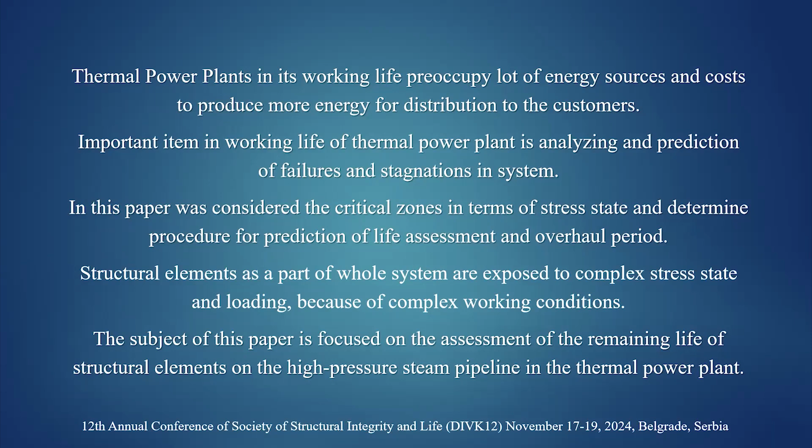The material of the high pressure pipelines is steel. The name of the material is very commonly used in thermal power plants. The equivalent in DIN is 15 chrome molybdenum vanadium 5 10. And thermal power plants involve critical loss of energy. Sorry. The first step is to define accurately the stress distribution in the structural elements. For this purpose, we're using the software package ANSYS, a well-known software package in the world. A lot of huge companies in the world work with that software. The characteristic material is 15X1M1Φ.

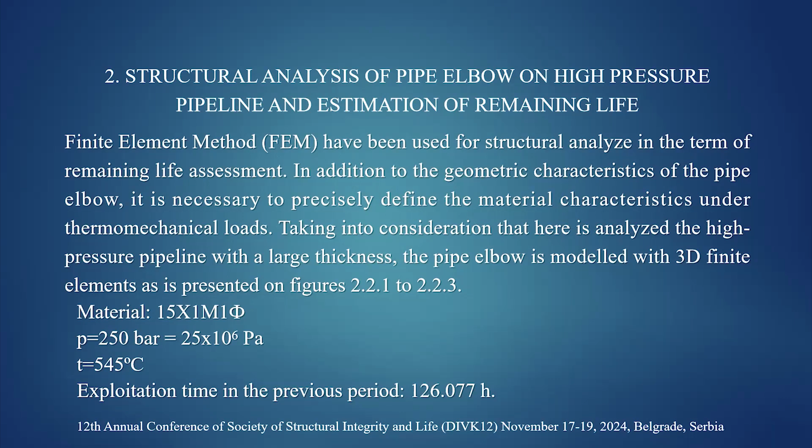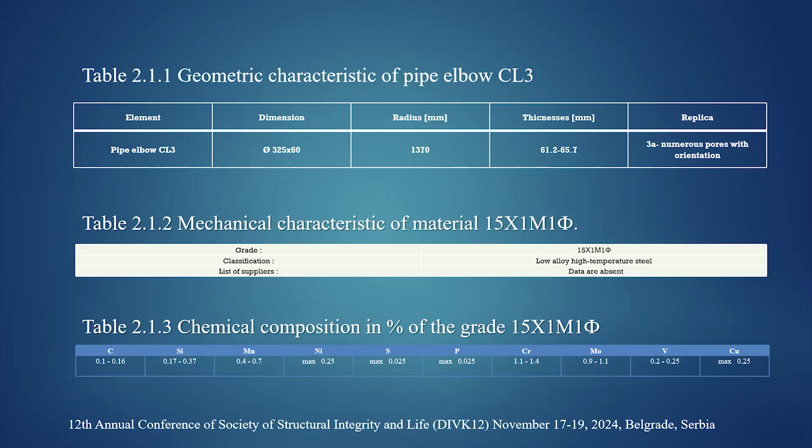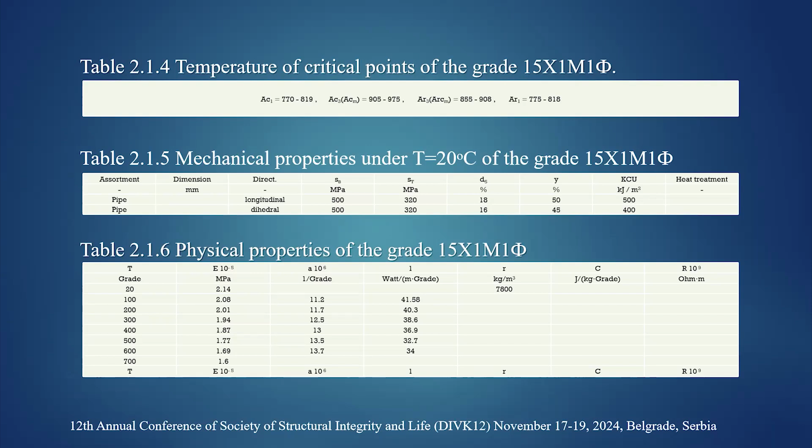Pressure is 25 megapascal. Temperature is 545 degrees Celsius, and the operation time in the previous period is 126,077 hours in service. That material is very famous. We also have to take into account the geometrical characteristics and also thermomechanical properties of that material, especially at high temperature and very extreme values of pressure. It's given in tables 2.1.1, 2.1.2, and 2.1.3. Temperature of critical points of the material, mechanical properties at 20 degrees Celsius in table 2.1.5. And also we have physical properties depending on the temperature in table 2.1.6.

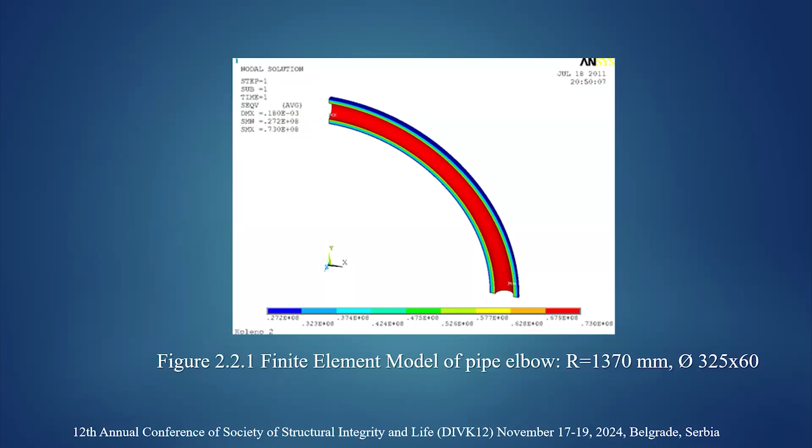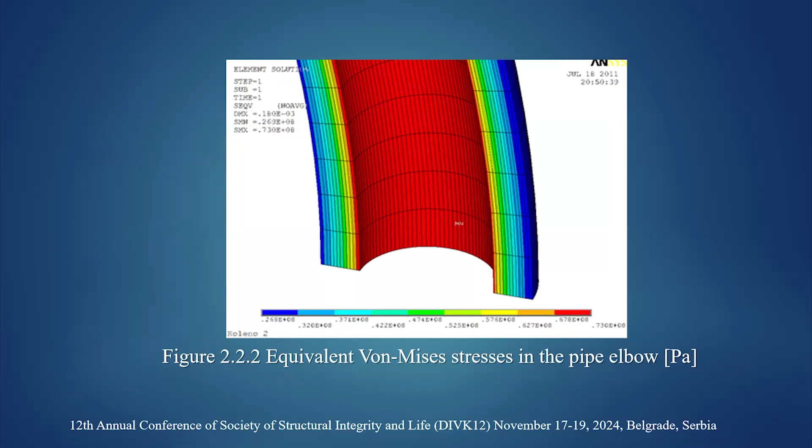Here is the first slide of the stress distribution. The given geometric radius is 1,370 millimeters, the outer diameter of the tube is 325 millimeters, and the thickness is 60 millimeters. It's a very huge thickness, but according to conditions, it's normal. This is a close view of the stress distribution in figure 2.2.2, and we saw that the critical value, the maximum stress, is 73 megapascal. This is in beta view. And we talk about the equivalent stresses in the elbow. The maximum value is 73 megapascals, but in our calculation we take the safety factor 1.5. So, for this purpose, in-house software was developed, and the value is 109.5 megapascals.

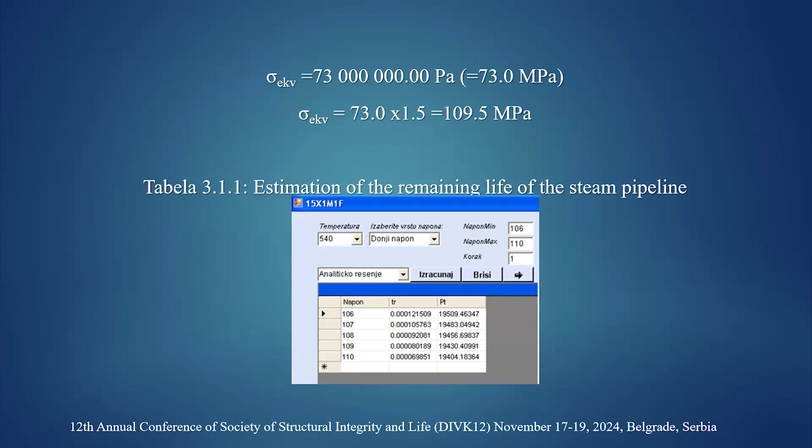Using the software packages for calculation of the lifetime of structures under thermomechanical load, the stresses I said previously, and the characteristics of the pipe elbow material, the lifetime for the concentric pipe elbow is around 19,404 hours, and the total lifetime of the pipe elbow is 146,000 hours. The obtained stress values and computed lifetime estimate satisfy the condition to allow the extension of elbow life by about 20,000 hours. It is approximately about 3 years. After 3 years, we have to again start calculating the life estimation of the elbow.

Structural analysis and stress state analysis were performed in this paper using the software packages. The stress state obtained by the finite element method is more realistic and represents an improvement in relation to the application of stress concentration coefficients obtained empirically. Finite element methods also provide a more detailed explanation of in-service behavior of steam line elements. Also, finite element methods help to determine the critical zone, the location of the stress concentration in the high pressure pipeline.

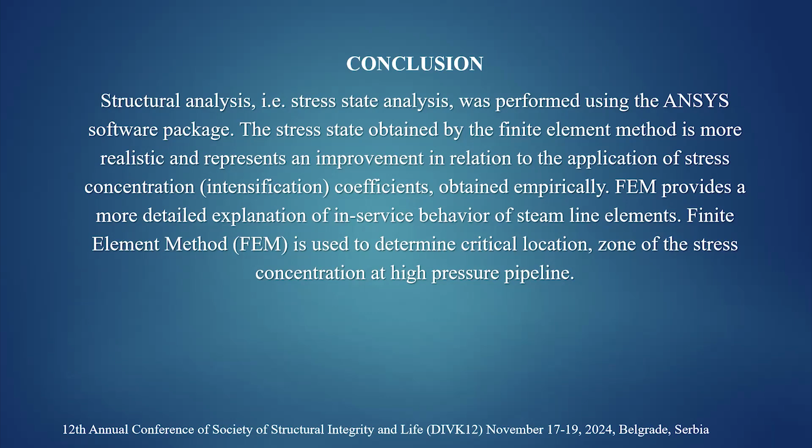This computation determined that the analyzed pipe elbow within the high pressure pipeline meets the condition that its life can be extended by approximately 20,000 hours, which satisfies the necessary conditions between two overhauls. The life estimation of structural elements in thermal power plants is of crucial importance for defining the period between two overhauls, and it is significant for saving time and money.